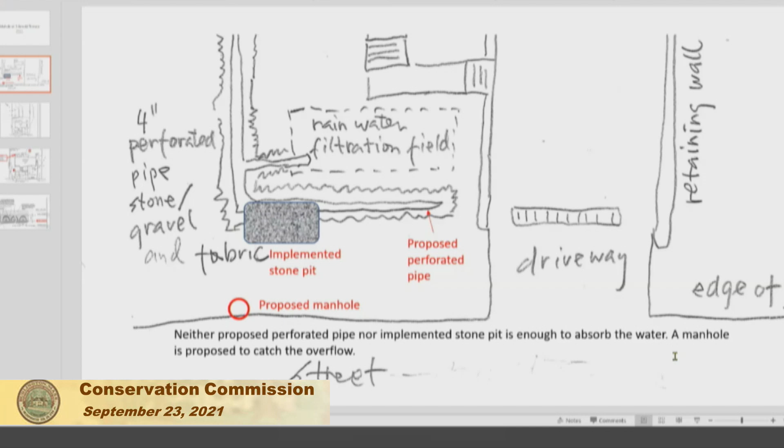For those of you who have visited the property, the job site recently — what you see, there's an opening here. That is not the Stonefield I was talking about. The Stonefield right now is buried under mud. That's basically the unseeded part of the front lawn.

But the problem is that the amount of water coming out of the French drain is more than either the stone pit or the proposed perforated pipe can handle, so it is actually overflowing onto the street.

So that is the problem. Basically, after heavy rain—actually this year the rain is fairly heavy, a large amount all the time—it overflows onto the street, and that is a problem.

It actually persists even after the rain stops. So eventually I contacted the engineering department and got a list of approved contractors. We made a plan to put a manhole into the street drain, the drain underneath the road surface, which is running right here. So that is basically this red circle.

The plan has been approved by the engineering department. So John, just a reminder, this has to do with the previous project because the water is coming from my property. He wants me to ask your approval to have this manhole project completed. So that's basically the situation.

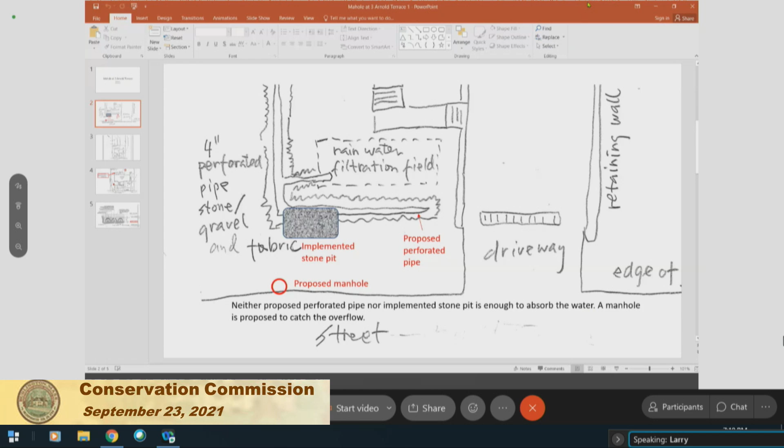All right, John or Eileen, do you have any comments on the situation of the water breaking out at 3 Arnold Terrace?

Okay, I'll make a comment. So it appears that what the Conservation Commission approved is not what was constructed—that would be my first point. The second point, which I have to point out every time somebody proposes this, is that the water in the street drain system, the system that will be taking this water, goes into the street drain system, and then there's an outlet into somebody else's backyard.

So every time somebody does this, they're transferring their water problem into somebody else's backyard, just as a reminder. Okay, thank you for those comments, John. All right, so let's go through and see if the commissioners have questions, comments, or suggestions. Don.

I think I would want a little more information, particularly on where the water is going to flow, whose backyard, geographically located relative to your property, just to get an idea of the actual effect.

Well, I'm not suggesting that we don't answer that question, Don, but I'd suggest the general principle is that if you take water and the storm drain system discharges into a lower area or a wetland, it is on somebody's property. It may or may not cause a problem—it's hard to say—but generally speaking, we avoid transferring water to someone else's property if we don't have to.

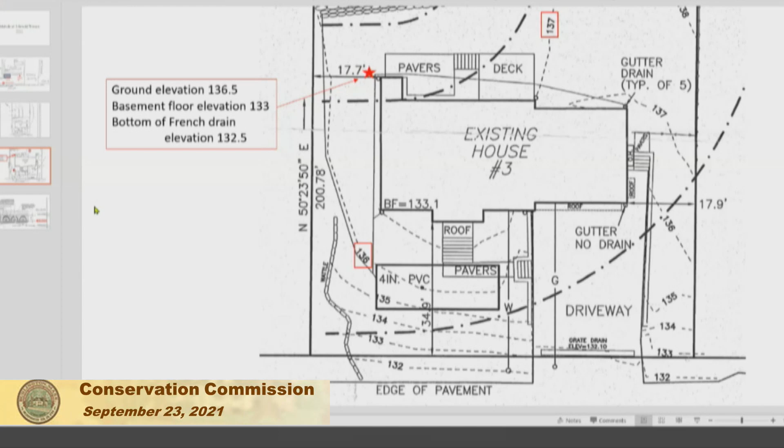So the question here is, first of all, are you an engineer, like a licensed engineer at all? I am an engineer, but I'm not a civil engineer. Okay, just curious, not that it matters, did you design it to put 2 feet of stone under the trench for the perforated pipe?

On the front, I wasn't planning to put 2 feet because I actually don't know how deep I can dig. I was planning to put a perforated pipe with some stone around it, not 2 feet. Okay, that's fine. At the time, I did not know how much water is in the back. Right, essentially, you need a system that's draining a lot of water off the hill, not just from your property, that infiltrates.

So here's the situation: I think you need a professional engineer to size the system properly, and they will size it. It's clear from the breakout that you don't have enough surface to volume ratio. In other words, you provided a lot of volume, but the amount of surface going down is insufficient to drain all that water. There's a certain infiltration rate, so you need a system that has more surface area per amount of volume that you're providing.

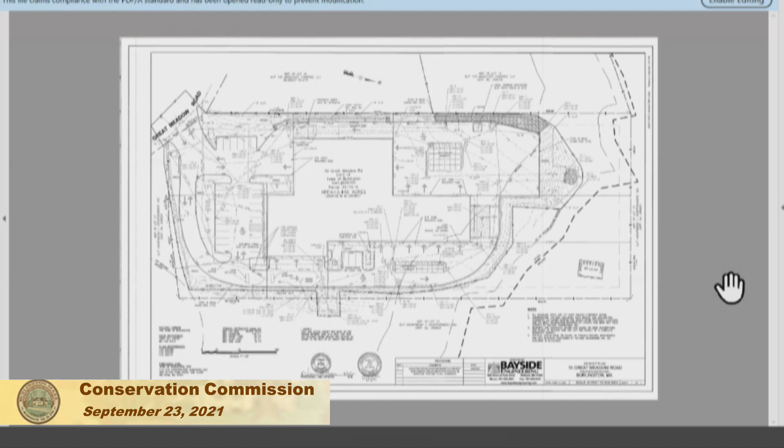Additionally, Weston & Sampson completed several focused site visits to observe installation of key components of the drainage system as required. Throughout the project, Weston & Sampson was in regular contact with the Conservation Department, providing the required reports and notifying the agent of any deficiencies observed during our weekly site visits. Weston & Sampson feels the requirements set forth in the order of conditions have been sufficiently met, and we've submitted our request for a certificate of compliance. I believe Eileen has shared the as-built on the screen, and I'd be happy to take any questions. All right, thank you.

John or Eileen, do you have a recommendation on issuing the certificate? Can you guys hear me? Any better?

Weston & Sampson gave us inspection reports every week. They were very responsive - if anything was missed, they addressed it. We've all been to the site a few months ago, and at that time it wasn't 100% stable, but at this point I believe it is.

Everything looks, to me at least, on the as-built plan as we expected. So I have no issues with this one. Any of the commissioners have any further issues or questions?

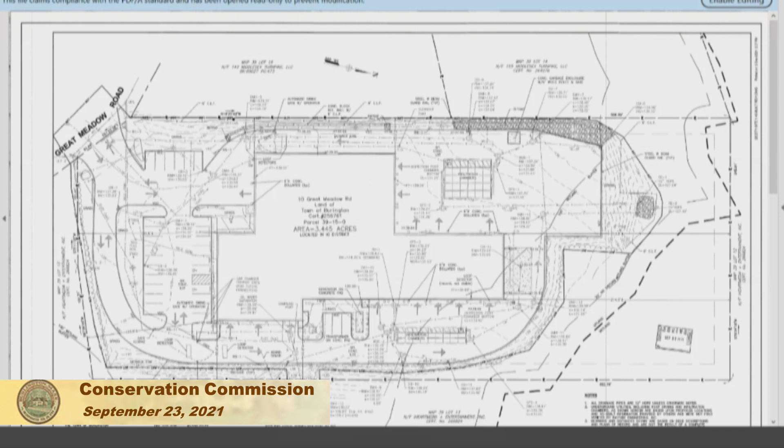I have one question. Is there regular maintenance required to the 2 infiltration chambers that I see? I'd have to check the spec and get you the information on that. I imagine there is for the manholes, yes.

So do we have that, John or Eileen? I'm just looking back to see if that's something we already received as part of the initial filing. I didn't have that. Well, that can be resolved after the fact. I can get you the information on that right away for sure. That's fine, thank you, sir. Appreciate it.

I'm hearing nothing further. Could I have a motion to issue the certificate of compliance for the project at 10 Great Meadow Road for the town of Burlington, DEP file number 122-630? So moved, Bill. Second, Indra. Don, how do you vote? Yes. Gail, yes. Indra, yes. Bill, yes. Jennifer, yes. The chair votes yes, so by a vote of 7-0, the certificate of compliance for 10 Great Meadow Road, the town of Burlington DPW facility, is approved.

Thank you. Just to confirm, I had a quick look at the order of conditions, and it said that a long-term operation and maintenance plan was already submitted and that they are to adhere to that.

Can barely hear you, Eileen. That was contained there, in everything. We can barely hear you, I can't understand anything you're saying.

As part of the order of conditions, there's a long-term plan that was turned in. She reminded me, yes, so we have turned in the plan for the maintenance of those. Thank you. All right, if there's nothing further, sir, have a good evening. Thank you very much. Have a great evening.

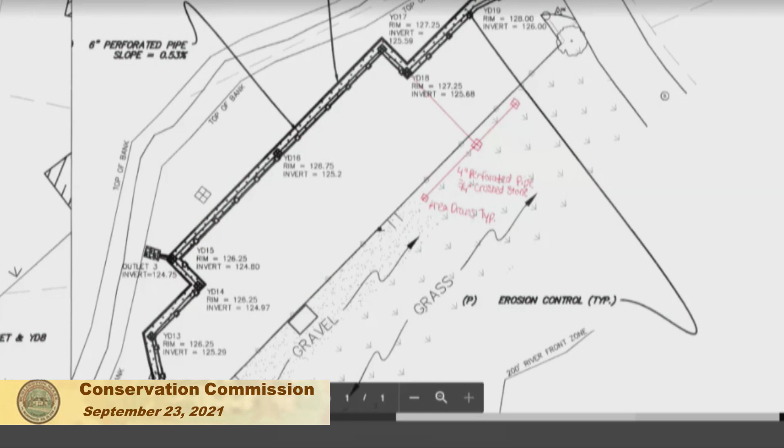Any of the commissioners have further comment on this one? No comments. All right, so this is a minor engineering change. I didn't hear anything else. It seems like everyone is in agreement, Megan, with what you're proposing.

Could I have a motion to approve the minor engineering change for 70 Mill Street, known as Rahanis Park, to add some additional drainage structures under DEP file number 122-655?

So moved, Gail. Second, Indra. Don, how do you vote? Yes. Gail? Yes. Indra? Yes. Bill? Yes. Jennifer? Yes. Ed? Yes. Chair votes yes by a vote of 7-0-0.

The minor engineering change for the project at Rahanis Park to add some drainage structures is approved. Thank you, Megan, very much. Very efficient. Thank you.

All right, next on our agenda. Larry, can you hear me any better now? What's that? Can you hear me any better now? A little bit. It's a little bit clearer for me.

Notice is hereby given that the Town of Burlington Conservation Commission will hold a WebEx virtual public meeting, during which time we will act upon a request for determination of applicability filed by Manise Donuts Incorporated. The commission will take all information related to a proposed drive-through lane and parking lot reconfiguration within a locally regulated riverfront area in the 100-foot buffer zone to stream bank and bordering vegetated wetlands. The property is located at the Dunkin' Donuts at 28 Winn Street, and the commission will thereafter issue a determination. The application is being heard under Massachusetts General Law, Chapter 131, Section 40, the Wetlands Protection Act, and Burlington Bylaw, Article 14. You may obtain a copy of this application and the plan by emailing conservation@burlington.org.

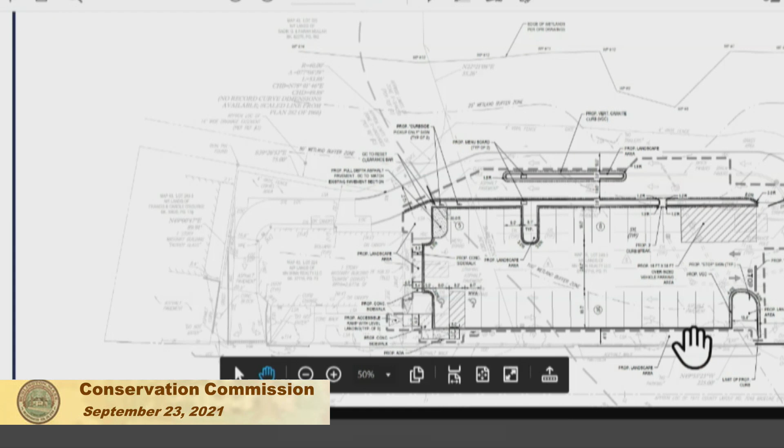So there are no changes to the building as part of this development, just to be clear. And as it's already been stated, there is a wetland and wetland buffer zone that currently exists on the northeast side of the subject site. The proposed parking lot reconfiguration and additional drive-through lane is located approximately 45 feet away from the edge of the wetlands and partially within the 50-foot wetland buffer zone.

The proposed parking lot configuration and additional drive-through lane will be located completely within the existing paved parking and drive-through area with no new impervious surface created. As part of that renovation, additional grassed and landscape islands will be included in the parking lot layout and will result in a net increase of pervious surface. No additional impervious surface as part of the development.

Stormwater runoff will continue to be collected on the roof and in the parking field pavement, closely reflecting the current drainage patterns that exist on the site. No new drainage devices are proposed, and we'll be directing all of that runoff to existing catch basins that are currently on site and then drain to the wetlands at the rear.

Appropriate erosion and sedimentation controls will be installed to prevent any sediment-laden stormwater runoff from leaving the site. E&S controls will be maintained as necessary until all disturbed areas have been stabilized through the end of construction. I think that's a general rundown, and I can open it up to questions.

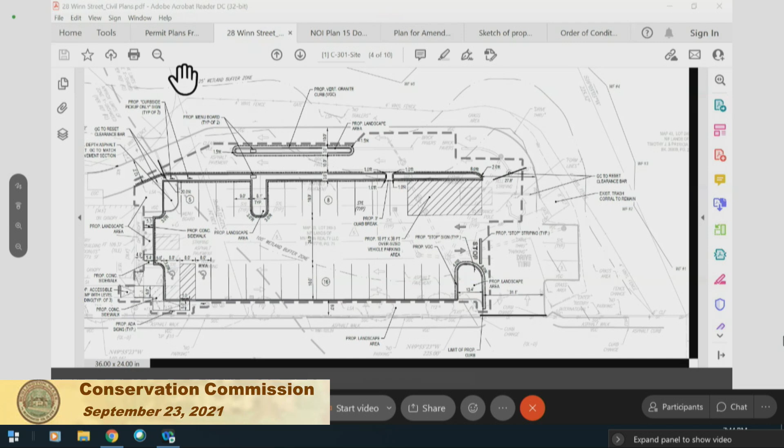All right, thank you, Eileen. So Dawn, anything on this one? Dawn, can't hear you, maybe you got muted too. All right, let's move on. Gail, anything on this one?

Just one thing - I wasn't at the site visit, but I saw the pictures and I know the location. Is there a need for a gate in this fence? There really shouldn't be anything going on behind that fence. I wonder if that could be gotten rid of. And then I looked at the planting plan, it looks all good. My only comment would be, why plant grass? Why not just put some more plantings?

Are you just talking about the ornamental grasses, or is there planning to be like lawn type grass? There's a combination of lawn and mulched areas with a variety of plantings, shrubs. I would be in favor of getting rid of the lawn type grass and putting in maybe a few more of the plantings you have instead with some mulch, because with lawn, no matter what we put in our conditions, people end up putting herbicide and fertilizer on it, and then you've got lawn clippings you have to deal with. I think it would just be better to add some more plantings there. That's my opinion, thank you.

May not be everybody's opinion. Dawn, are you online yet? Yeah, I was having a technical problem. I have nothing further. All right, thanks, Dawn. Indra, anything further? No, I have nothing further.

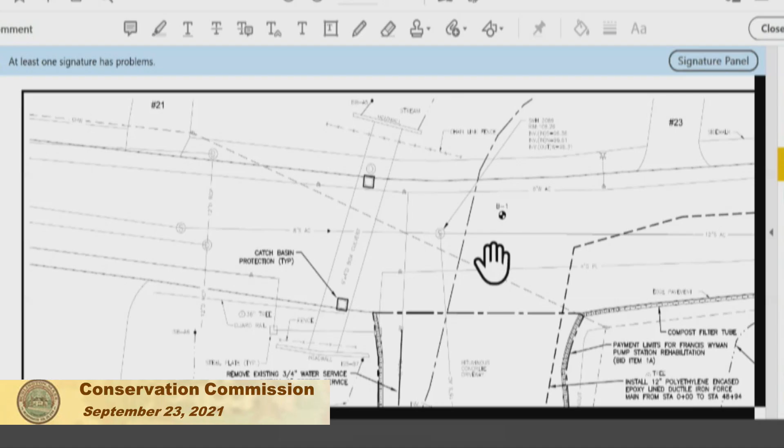So you have the floor, feel free. Okay, sure, yeah, it's a continuance from last meeting. I do have the plans if we need to review any of them. The proposal is to rehab a 50-plus-year-old pump station. No increased impervious area, nothing outside of the dewatering area, no further disturbed area. It's part of the proposal, and the new force main would be located in the street. Currently it's located, much of it, within wetlands and cross-country, so it would be a brand new force main, all within the street.

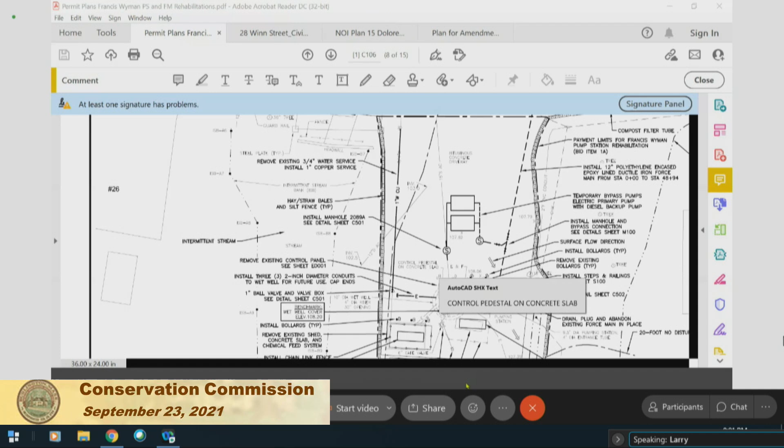Just for the record, what I have listed here is we were going to remove and dispose of knotweed, we talked about that, and we were going to talk about the assessment of check dams, or something, we talked about it. I don't quite remember where we left off on that, so I'll throw that out there before people start talking. Dawn, anything further on this?

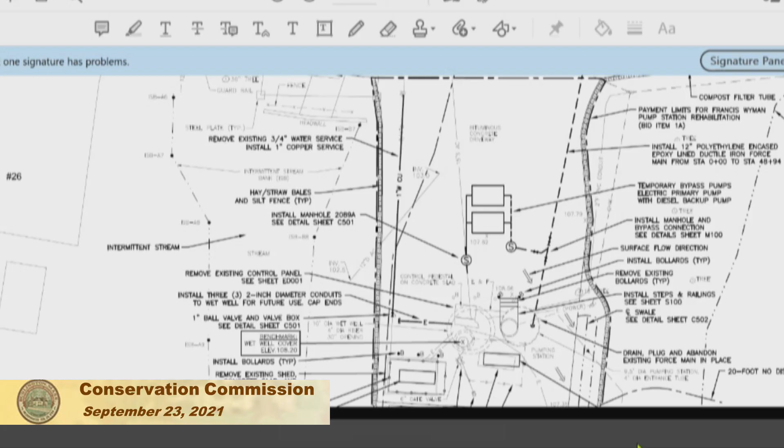I guess not. So what we'll do is—do you have some draft documents, Eileen or John? Okay, I'm having all kinds of technical difficulties here, but I'll try. All right, so we'll do the draft bylaw decision first.

Project description: updating the sewer pump station and replacing the sewer force main. Work would be within a locally regulated riverfront area in the 100-foot buffer zone to bordering vegetated wetlands and bank. Then the next is the filing history. Wetland values and areas subject to protection—I went over the resource areas already. Then the discussion of the functions and values of the wetlands.

Stormwater management: there's no drainage system in place on the pump station currently. Part of the lot will be pitched to a proposed swale. The swale will contain a perforated pipe which will pitch towards the wetlands, and the pipe will be covered with crushed stone, gravel, and loam, which will be seeded. The commission finds that this low impact development technique is an appropriate design, certainly an improvement on what's out there now, which is basically no stormwater management at all.

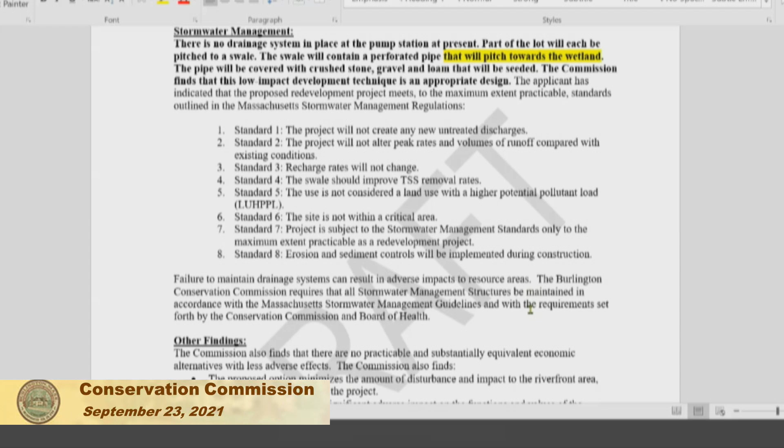Then there's a discussion of the stormwater standards. Obviously this is a redevelopment project. Other findings—the discussion of the resource areas.

So in the riverfront area, the proposed option minimizes the amount of disturbance and impact to the riverfront area. It will not have an impact on the functions and values of the riverfront areas. There's no net increase in impervious area.

The abandonment of the sewage pipe that currently goes through the wetlands, by relocating it onto the road, is a distinct improvement to the riverfront. In addition, the low impact development drainage system is an improvement to existing conditions in the riverfront area. There's also a proposed removal of knotweed, although admittedly it'll be a temporary removal, giving a temporary improvement in the buffer zone and riverfront area.

And the rest of it's all standard. The decision is a proposed draft negative determination, and there's no proposed bond as it's a municipal project.

On to the bylaw, I'm on to the order of conditions, which is fairly standard. Condition 20 is a reference to all the plans. All the orders, all the conditions on the first page are standard conditions.

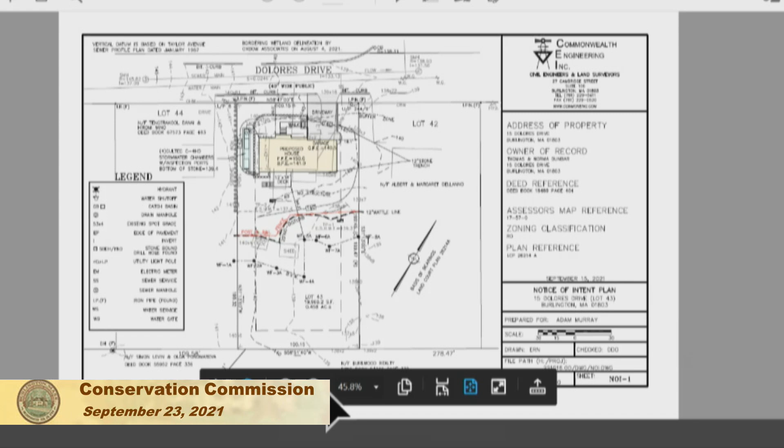Sure. I wasn't there, but I know there was a site visit last week with the staff, and I believe the wetland line was reviewed, and there were no changes to that line. As far as the plan goes, the only change we've made is we made the fence line a little more regular—we straightened it out, and it still runs fairly much along the 20-foot no-disturb line. But now it's a straight fence line and it seems more natural. I think that's the only change to the plan.

All right, so basically the only change is the fence doesn't have so many curves in it. Right.

All right, so John or Eileen, anything further, anything unresolved from your point of view? No, nothing unresolved. We did meet with, I think it was Mr. Cormier, on site, and we did some borings, and we were generally in agreement with the wetland line as they found it. We told them they could straighten out the fence a little bit, but they didn't straighten it very much, so that's totally fine, that's up to them. We also confirmed that no major trees are coming down in the course of construction, at least unless something becomes an issue in the field.

There's a couple of large arborvitaes at the front—they are, of course, coming down, and some shrubs are too. But because we had a concern about trees, none of the trees in front of this 20-foot no-disturb line at all are coming out, is my understanding. Very good, thanks Eileen. All right, Dawn, anything further?

Gail, no. Indra, no. Bill, no. Jennifer, no. Ed, no. The chair has nothing further.

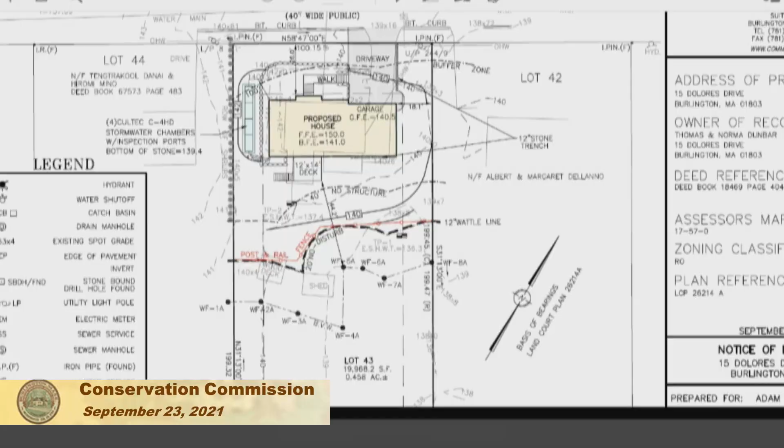Will share them in just a minute. I just wanted to say thank you to David Romero. He's taken to sending these nice colorized sort of plans. I think they make things really, really clear. I think it's very nice.

Thank you, David. Sure, I will just share. I'll start with the bylaw, hopefully. Yes. Oh no, that's Brian's. Sorry about that. Let me close his. Oh no, it's not. That's weird, it's not open. No, that's still the same one. This makes no sense. Sorry. All right, here we go. Now we're going to get it.

Okay, sorry for the technical difficulties that were entirely on my end. So a Notice of Intent and bylaw application was filed for demolition of an existing single family residence, deck, attached deck, detached deck, driveway, and removal of shrubs, and construction of a new single family dwelling, attached garage, paved driveway, deck, paved walkway, deck, driveway, and associated grading and utilities. I'm proposing planting of 4 shrubs within the buffer zone bordering vegetated wetland.

Then we go into the filing history, and the plan document references are basically the plan, very similar to what we just shared from David.

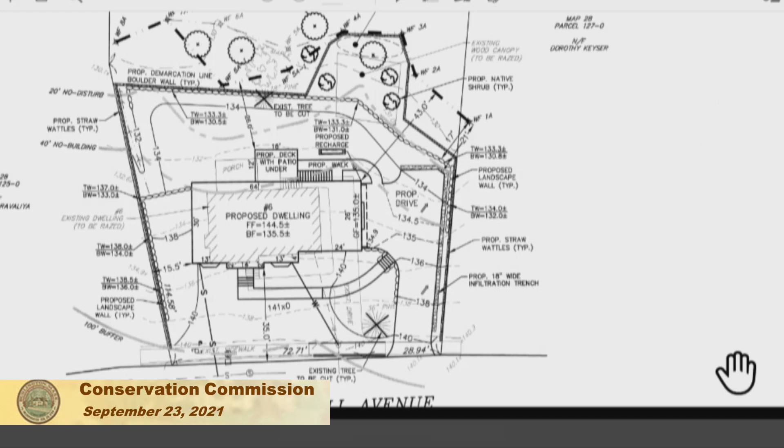Okay, so I was before you on April 8th regarding the order of conditions for 6 Terrace Hall, and we started construction at the property. So the rear grading was just a little steeper than we were like, so that's why I had proposed a retaining wall to try to level off the grades a little bit. And then also with the retaining wall, I was also looking to put a rear patio underneath the rear deck and connect the patio to the driveway as well.

And that was pretty much it for changes. It wasn't a lot of changes from the original order of conditions that was approved. All right, thank you, Jonathan.

All right, so Eileen or John, you have some comments for us on the proposed amendment? It'll be Eileen again. I don't really have any comments. Most of his proposed changes are quite small. I just want a clarification from Jonathan.

The retaining wall that you're proposing, is it this boulder wall that you're calling here, which is the demarcation line, or is it something at the 134 line? So the boulder wall, I'm sorry, are you looking for clarification on the wall or the demarcation line? On the retaining wall, where is it in this plan? I'm just not. So it's like the circles, like a retaining wall.

So the boulder wall, it is just like it's a retaining wall. Okay, gotcha. So it's approximately 2-foot boulders that we'll build a wall out of, instead of like a fieldstone wall or a block wall. So okay, they're very large boulders that cannot be moved easily without heavy equipment.

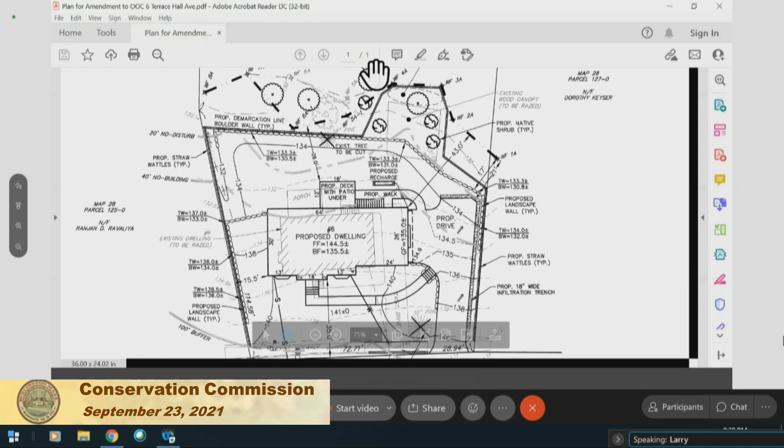I am not in favor of a post and rail fence. It's not going to do anything. Either you put up a solid wall and cut the look of the yard in half, which is already pretty small, or you just leave it the way it is with a 2 foot drop. And if it comes to our attention, it would be an enforcement matter, and you let the people who buy it know that no dumping in wetlands is allowed. That's sort of the way we go with a lot of things too.

I agree, Larry. That's the choice. It's clearly demarcated by this 2 foot drop. It's not meant to be a barrier—it's really a demarcation, and that's what it is.

Right, right. Okay, so is there anyone in the audience for this? This is an amendment to an existing order of conditions for 6 Terrace Hall Ave to build a wall and do a little bit of grading.

All right, Eileen or John, was it anticipated that we would close this, or are we going to have an amended hearing, hold it open, and close it next time? It's up to you guys. I did draft something in case you prefer to just get it closed tonight.

It sounded like there are non-issues, Eileen—is that what you heard? I think on the whole, yes, although from the amendment I proposed, I'm thinking it might be a good idea to ask Jonathan to put up a sign at the edge of the boulders, or somewhere around the boulders, saying 'wetland, no dumping' or something like that. I don't yet have that in the amendment, but I can put it in there.

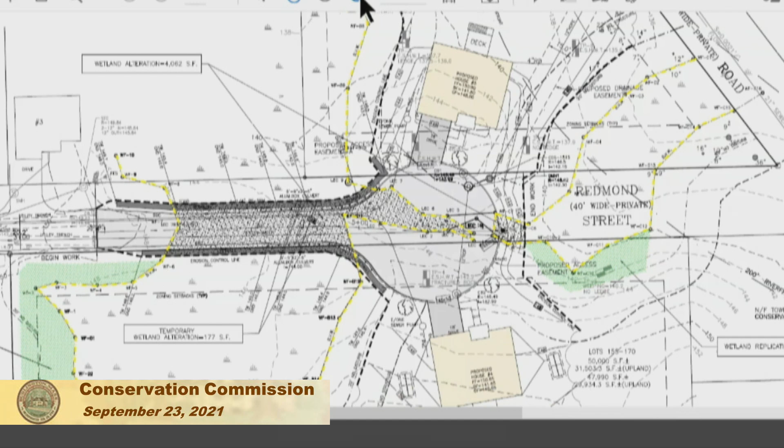We've gone through different versions of trying to come from the other direction from Raymond Road. We've had different configurations of pavement, from a T-type turnaround to what you see in front of you now, which is a full circle, something the planning board and fire department were really very much interested in. Unfortunately, that also created more impervious surface. So we came up with, and I know this has been recommended before, a configuration that utilizes retaining walls and has a fairly narrow road of 18 feet wide, which matches what Redmond Street is now anyway. Redmond Street goes anywhere from 17 to 20 feet wide.

So we were proposing an 18-foot wide pavement approaching a full circle, an 80-foot diameter circle for full turnaround. Those circles would be partially on the lots in easements, but that would provide safe access and egress from the site for any kind of safety equipment or vehicular travel.

The houses are shown on two lots, number 4 and number 5, about the same as they were from the beginning, and about the same size and shape. We'll have 18-foot wide driveways. The driveways themselves are about 20 feet long, maybe a little bit longer.

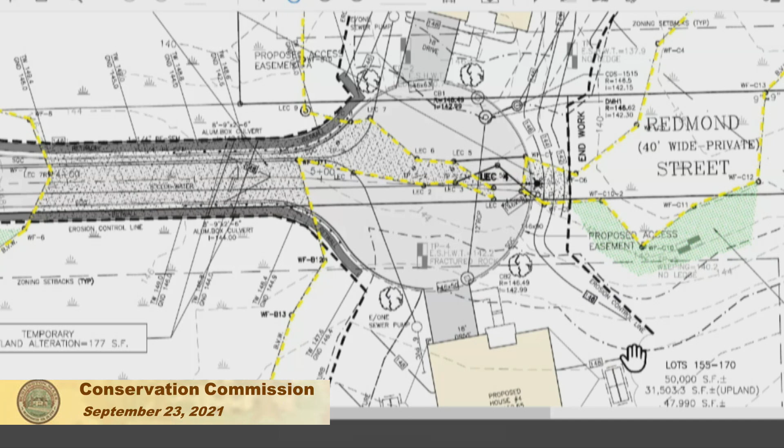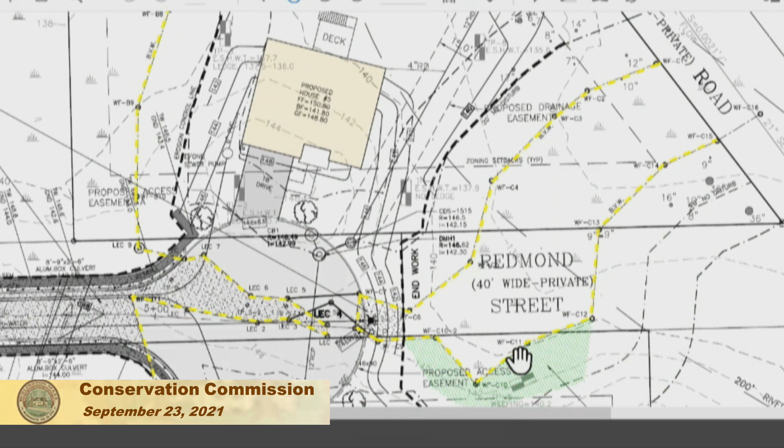There will be a full drainage system on site. We'll have 2 catch basins that will collect all the stormwater runoff, which would include the driveways. Those 2 catch basins will then convey that to a water quality device, and then further up to a large infiltration system located behind house number 4, Redmond Street. We're located there because that is where we found the best, most suitable soils. The groundwater was low there, and we were able to achieve our 2-foot separation and still have very good soils, all very sandy gravel material. So it's very suitable for infiltrating the runoff.

I will note that the runoff from the roof on house number 4 will also be connected to runoff on site. We're going to have chambers for that roof as well. The roof of number 5 will go into that same large system.

Again, there are 2 retaining walls along the edge of the pavement. The highest point, I believe, is about 6 feet high, right at the crossing where the stream is. We're proposing a large culvert there, about 8 to 9 feet wide and about 2 feet tall. It's kind of broad but shallow, with an open bottom so we can let the natural stream occur as it is now, and hopefully it'll go back to its native condition. By doing all this, we were able to keep the wetlands impact down, so we're filling a little bit over 4,000 square feet of wetland.

Replication, we are going to replicate wetland 1-to-1 on this plan here at the green areas, both on the lower lot. Right now, the area to the left is a pretty large area that's actually been filled over time, we're not sure how, by the abutting property. So we will clean that out and restore it back to a wetland. That will be replication. And on the other side of the lot, a smaller area, which is not too much of a cut, we'll be able to achieve the same grades and also create wetland there as well.

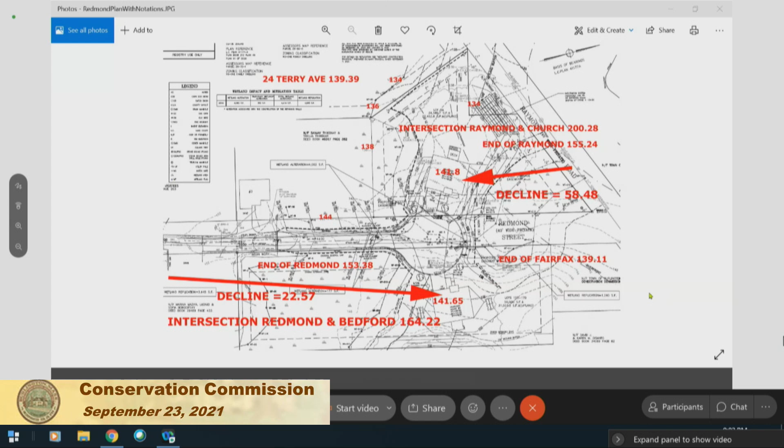Yeah, I've got a few. What is the elevation at the very center of the cul-de-sac? What's the elevation right here, in the center of the cul-de-sac? Approximately 147, roughly.

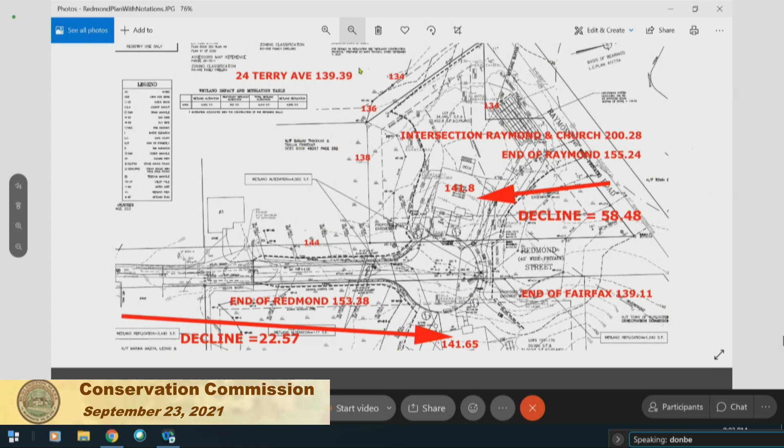Okay, so this chart is just notations made on your plan. What I'm concerned about is, from Church Street to your foundation at 141.8, you've got almost a 60-foot drop. If you recall the video a neighbor had shown, that's why you got that water flow looking like a torrential river. So the point is, everything is going down below your property. The lowest point beyond your foundations is up in the wetlands behind the property, where you see the 136, 134, 134.

Is your infiltration system going to be able to protect the wetlands from the water hitting your house and coming down from the other side? You've got a decline of 22.5 feet going from the beginning of Redmond and Bedford Street down to your foundation at 141.65. So everything is basically hitting your property and then draining into the wetlands behind. That's the picture we got when we put these numbers with your drawing, and it looks like it might be presenting a problem to the wetlands back there. That's all I have.

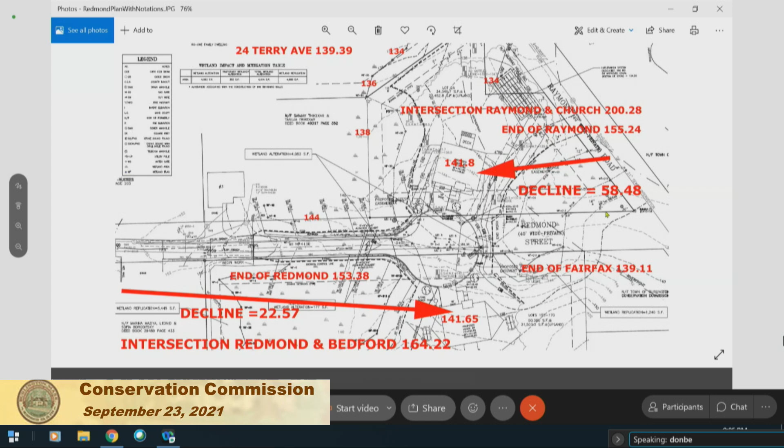Don, are you talking about handling the water coming down Raymond Road and into the wetlands? Coming down Raymond and Redmond. All right, and if you look at the elevations, everything's going to the wetlands, downhill from the infiltration system, but it's coming from at least two directions. At the bottom of Fairfax, there's less of an incline, so water may actually wind up heading to Fairfax as well, but you can see where the water's going to wind up. Can your system handle all that? That's the concern I have. Don, I'm not suggesting it's not a real issue.

I'll just add to what you're saying. The edge of the infiltration area is about, I think, 50 feet to the edge of the bordering vegetated wetlands. So it's about 50 feet. I'm not sure what that means, but it's a considerable distance.

Yeah, I mean, looking at the way stormwater flows these days, and given the fact that it's going to get worse with climate change, my question is we ought to know if the system they're proposing can actually handle this. It's going to be a huge load.

Mary Trudeau, or I guess David, you're on this—do you have any comments on what Don is articulating? Well, I'm not really sure, but we've designed for the road. That's what we're required to do. We're handling the runoff that comes from the new pavement, and that's what we have. We have the catch basins sized for that, the piping sized for that, and the infiltration system designed for that too, 2 feet above the groundwater.

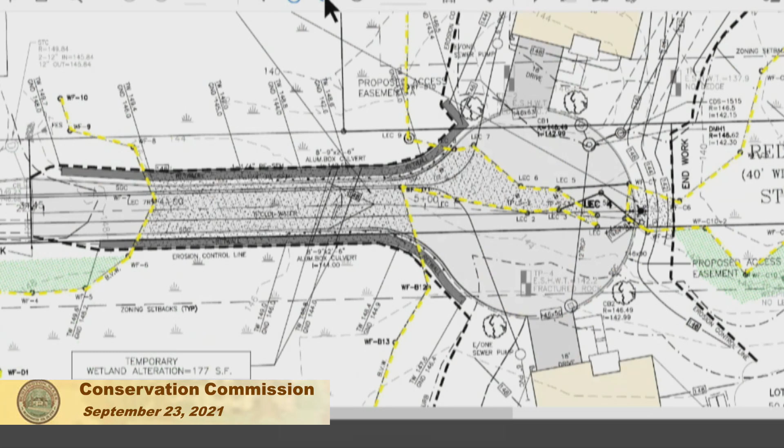Right, so following up on what Larry was talking about in terms of whether the wetland is able to function as it was before. My question is, and I know that you're not responsible for the water that comes from different areas off your site, however, that water is going there presently and is hopefully being controlled by the wetland acting like a sponge, taking up floodwaters and so forth. But now you're adding this impervious roadway, these houses, driveways and whatnot, and that water is now going to be infiltrated on site, which wasn't there before. So does this wetland have the capacity to take that plus what's already going to that site?

Well, we're not putting any more water into the wetland itself, not directly. We're collecting runoff in our paved area with the catch basins, and then we're putting it into the infiltration system, which is supposed to mimic what we're paving over. That's far enough away from the wetland, so it'll go into the ground and eventually hit the groundwater, which is what it's meant to be.

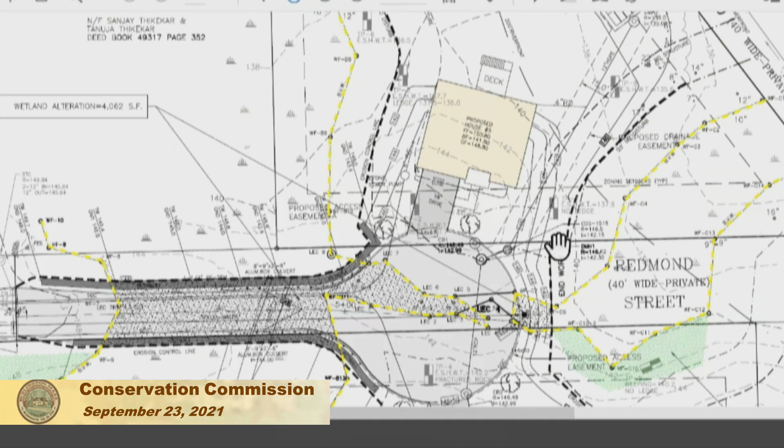So my other questions were related to the locations of the houses. What's the property line on these lots? I'm looking at lot 2A for house number 5 - the 200-foot riverfront line cuts very close to the corner of the house, and on the other side is the 40-foot no-structure line. I'm trying to figure out how much yard these people have, because they're basically a house plopped down like an island in a wetland. The other house, the 40-foot no-build isn't quite as close, but 2A looks more tight. So where is the property line there?

It's kind of a funny shaped lot, perpendicular to Redmond Street, the sideline. The house is definitely in a tight spot, right between the riverfront and the 40-foot no solid structure line. It's like a trapezoid. So that's the property line, and quite a bit of that property goes into wetland and riverfront.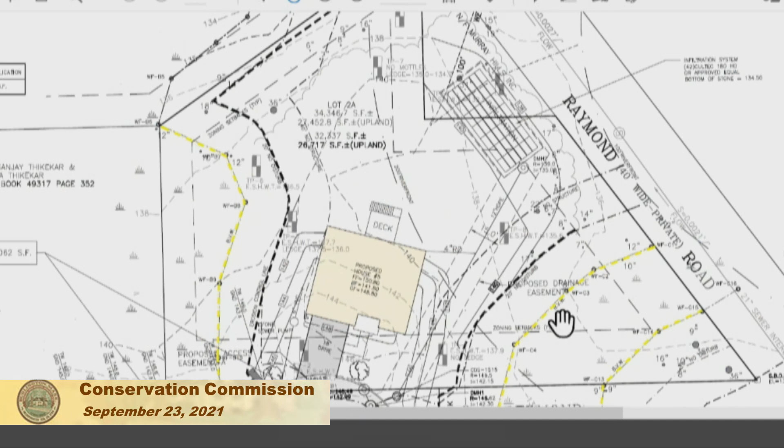So if they wanted to put a shed or whatever, we'd be talking about that little arc area between the 40-foot and the 200-foot riverfront off their deck.

What is the property line on the other one? That's more of a long rectangle, goes all the way out to the left on the screen there. Does it go to the replicated wetland? Yes, that's all on that lot, for the lower lot. It's a long rectangular lot.

Wowzer. Okay, they're gonna be paying taxes on a lot of land they can't use - a lot of wetlands, yep.

All right, are these houses going to have propane? I don't know, Phyllis might know. I'm not sure we'll have natural gas, but they're probably going to be propane. Because I'm asking about your utility trench - would that potentially have a gas line going down there as well as electric? Considering how the national grid is performing lately, we will probably use propane.

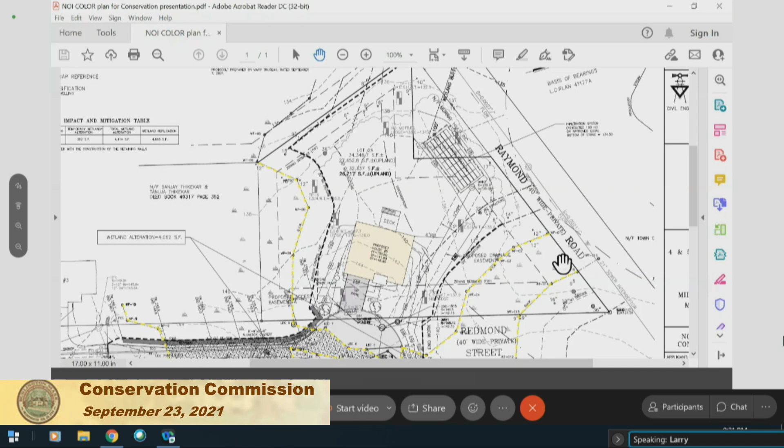So, I'm looking—our distance from that location did show that we have a 2 foot separation from the bottom of our system to high groundwater. So that's a 2 foot, if you want to call it, level of tolerance that we have, so we don't get into the groundwater. So we do have a buffer there between what is indicated as high groundwater and our system.

But I'm looking also at the bottom of the infiltration chamber—it says it's at 134.5. And what you described as one continuous wetland system, some of the wetland is at an elevation of 138, you know? I just think that this is destined to fail.

Plus we have massive amounts of water flowing down the road, and from that video that we've seen, it's going to create peak flooding times as well.

Together with that, you're saying the basement floor is at 141.8, and yet you're replicating wetlands at 142. That doesn't sound very comforting to me.

You need sewage pumps now because the elevations are so low, and yet you're not putting in sump pumps to protect the basements. I don't understand why you wouldn't automatically consider sump pumps. We've talked to some developers who say, I put sump pumps in every house I build. It's a simple, inexpensive protection system for whatever happens, including this.

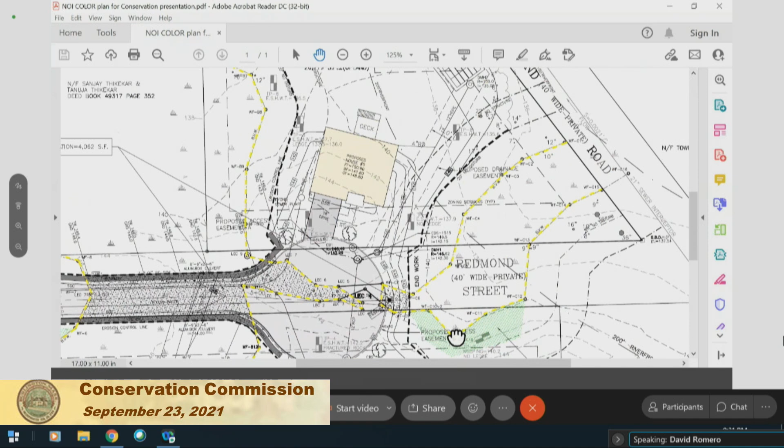Yeah, if the commission would like us to do another test pit out there to confirm that, and if the commission would like to come out and witness it, we'd be happy with that. We could do that, sure. We can ask our staff if they think that's a good idea. Okay.

On the 1.7 acres that you're donating in lieu of meeting a 2-to-1 versus 1-to-1 replication ratio, have you written us anything on any significant features or value of that? Like, is it adjacent to something, is there a trail, does it enlarge an existing area? Is there a paragraph you could write that would help quantify the value a little more? I'm not asking for much, but something beyond just saying you're offering 1.7 acres of conservation land, which has its own value.

I get it, Larry, would be glad to do that. Okay, thank you, I appreciate that. Just a little bit more information as to what the commission and the town is getting if we approve this.

And then the last one is a general question to anyone who wants to answer, and our staff, John and Eileen - by foregoing the 2-to-1, because replications are notorious for failing sometimes, part of them fail, is there a risk at all by going to that ratio versus allowing 1-to-1 with this trade-off?

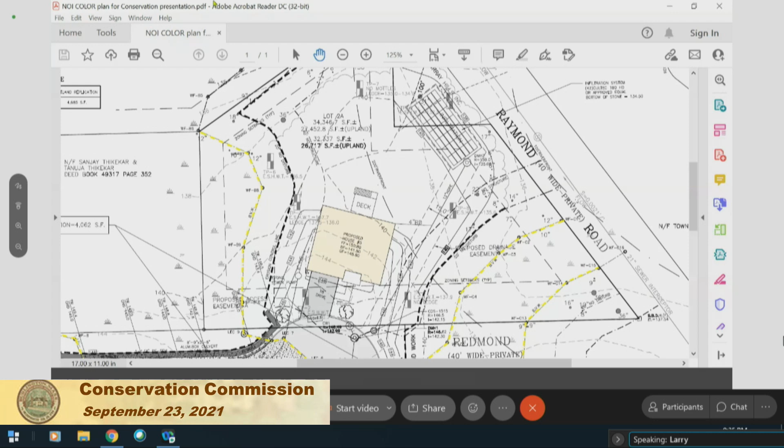Okay, so before I review what we have, are there any neighbors or anybody here to comment on this project - an abutter, a neighbor, or interested party? Did not hear anyone. Okay.

So why don't we - I think it's worth taking a minute for everyone, let's go down whatever list we have. I think John mentioned the ownership of the infiltration - he suggested that should be clarified. I think you heard that.

You said that you could provide a little more detail on the value - what it's connected to, or how close it is to some other conservation area, or what's on it, the 1.7 acres. You thought you could give us a few words on that. You said the plan was going to be changed to switch to a concrete pipe because of what the engineering department said, for the crossing, is that correct?

Yeah, they're more than likely going to ask for a concrete culvert. Yeah.

You said that you would more than likely require waterproofing and sump pumps. You don't know if you're committed to that, but you said more than likely. Yeah, I can speak with Mr. Murray and see what he's going to say about that. Then we can let you know. Okay, so you'll get back to us. Mm-hmm, I mean, I think so.

He's been building houses for a long time. Yeah, I think he knows what he'll need, so I'm not too worried about that. Okay.